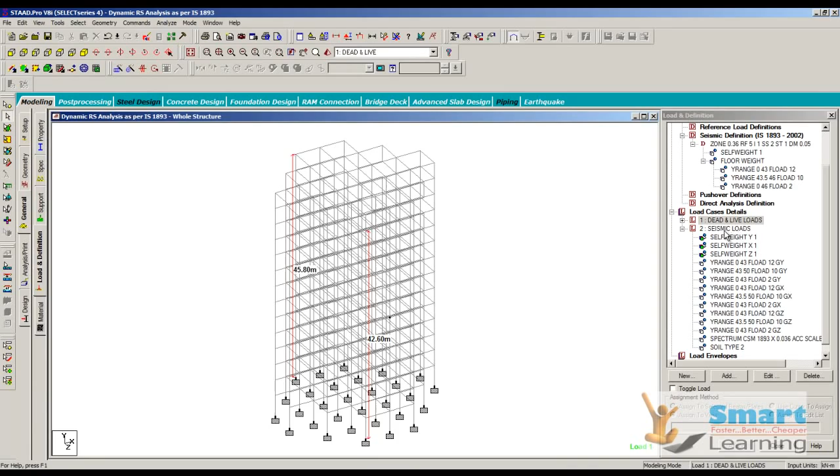So when you go to the seismic load and go to add, for the self weight direction go to X, enter 1 and add, go to Y, again 1 and add, and go to Z, 1 and add, so that these 3 will be added. After selecting this condition, you have to apply assign to view, so that it will be applied to your view, just like the Y direction, X direction and Z direction.

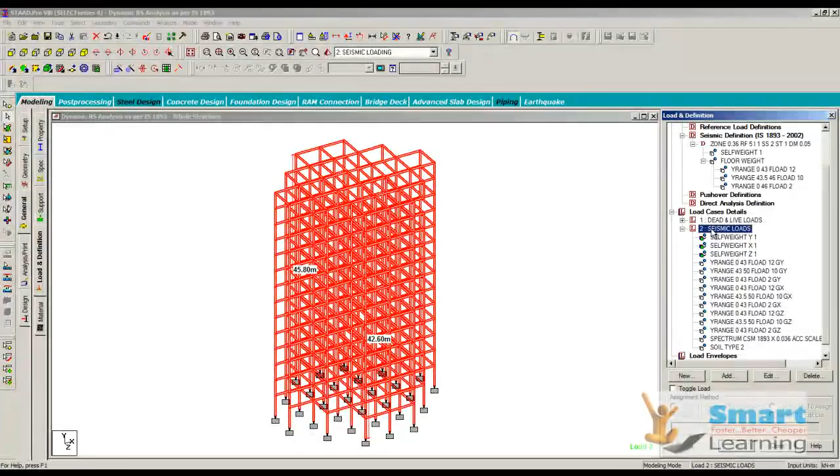So these are the 3 fundamental self weight contribution factors which you consider under the seismic load definition or the title you create, and you keep on adding that information. Now we'll move to the other side. Here you saw the dead load in the X, Y and Z direction. Next we'll talk about the dead load contribution on your floor load except the top floor.

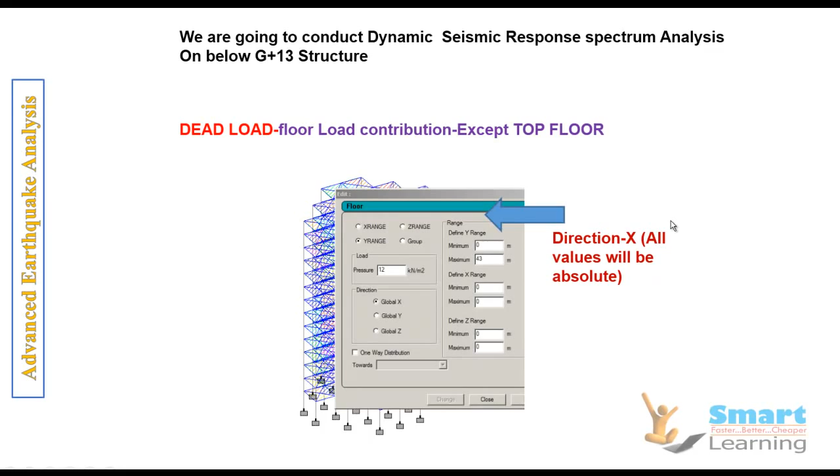It was -12. So for calculating in the direction X you have to go for 12. For the direction Y you go for 12. For the direction Z you go for 12. And here the range is 0 to 43. For the top floor also you have to go for the direction X, Y and Z. So except the top floor we have considered here the direction X. Again here the direction Y, same 12, only the direction is changed, and 0 to 43.

This is the second load case for the dead load except the top floor. And again for all the rest of the floors in the direction Z, this is the same factor. So here you have to apply it 3 times in the 3 directions, as you can see 12, 12 and 12. This 12 we have applied in the Y direction, this 12 in the X direction, and this 12 in the Z direction.

So for this seismic load, when you go to add and go to the floor load, here you go for 12, go for X, and set your range 0 to 43 because it is below the top floor, and go for add.

Again go to the Y direction and set 0 to 43 and go for add, and again go to the Z direction and 0 to 43 and go for add. So after that you will be creating this.

Just like that, for the top floor you have to again apply the 10 kilonewton per meter square 3 times in the X, Y and Z direction. This is the Y range, 10 without any symbol, negative or positive, Y direction, X direction which you can see here, and again for the Z direction. So these contributing factors for all these 3 directions for 10 kilonewton load

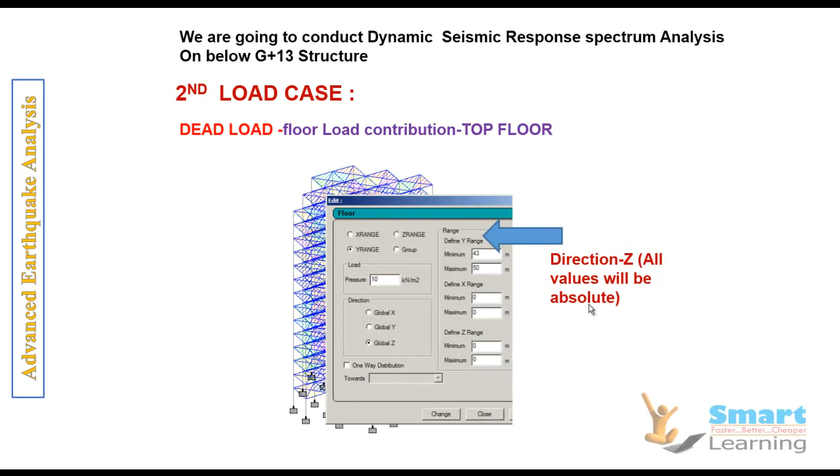need to be considered along X direction 43 to 50 for your top floor, 43 to 50 again for the Y direction for the top floor, and again for the Z direction 10 kN per meter square 43 to 50, because all this contributing factor will give you the seismic mass which you consider in your response spectrum dynamic analysis as per IS 1893 (Part 1): 2002.

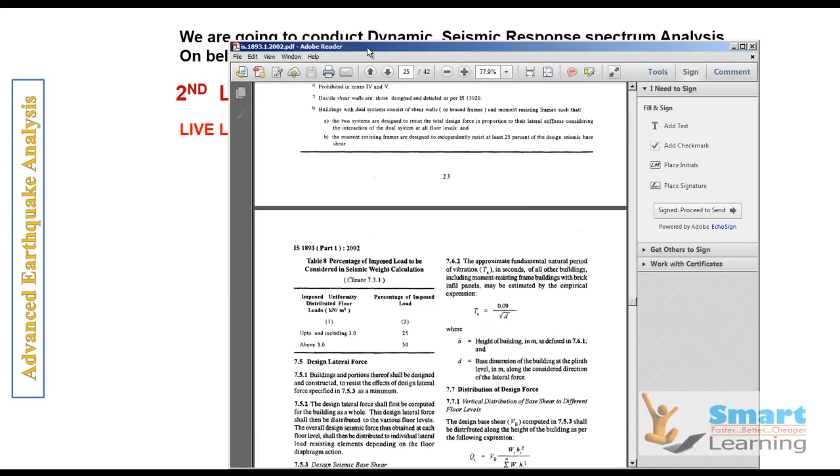And after that we are going to consider 50% of your live load contribution for all the floors. This is as per the IS guidelines, which I would like to show you so that you can relate why instead of 4 kN per meter square we have considered 2. So let us understand this from the IS code book. If you go to page 25 from your exercise folder, IS 1893 Part 1 2002, here you can see the percentage of imposed load to be considered in seismic weight calculations.

So up to and including 3 kN per meter square of uniformly distributed floor loads, the percentage of imposed load which you are going to consider for the seismic weight calculation will be 25%. But in our case, this is 4 kN live load. So above 3, you can see 50% you have to calculate, as per clause 7.3.1.

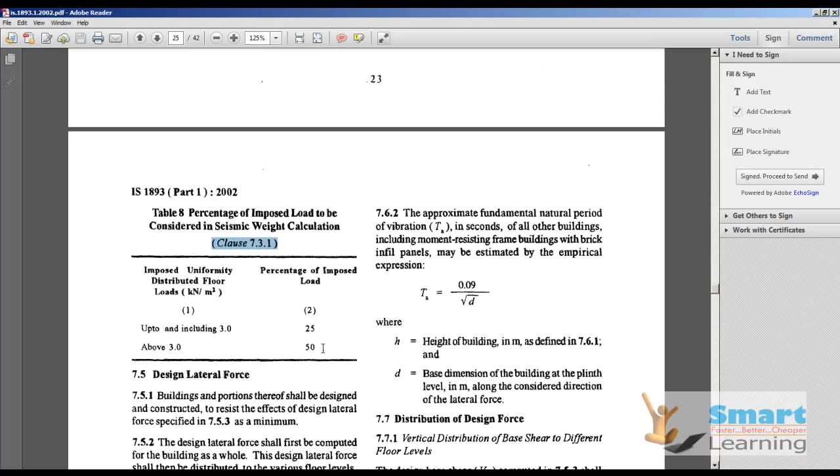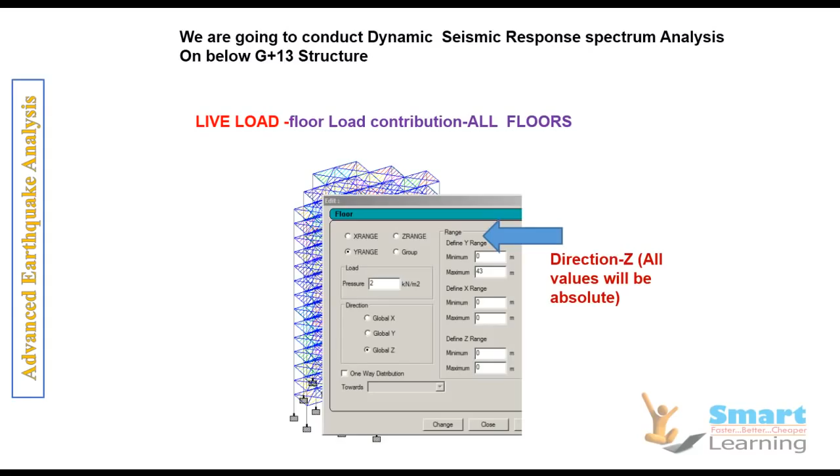So this will be 2 kN per meter square for all the floors in the direction X, in the direction Y between 0 to 43, and along the direction Z from 0 to 43. And you can also consider this between 0 to 50 so that all the floors will be considered. So what I will suggest is you go for 0 to 50 so that all floors will be considered.

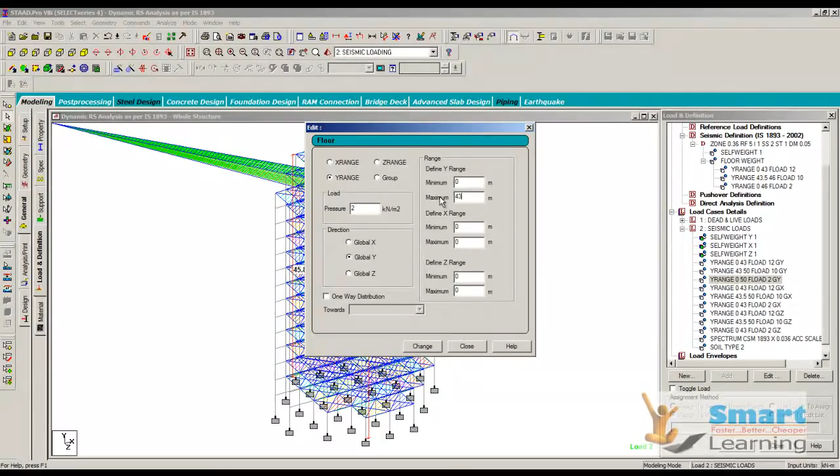In fact for the top floor it has to be 1.5 and its 50% is 0.75. So again you can apply a contributing factor. So what I will do is I will just keep it 43, and another step we are going to add here for the top floor. Go to add, go to floor loads, and 0.75 will be 50%, 0.75 kN per meter square in X direction between 43.5 to 50. So this will be for the top floor.

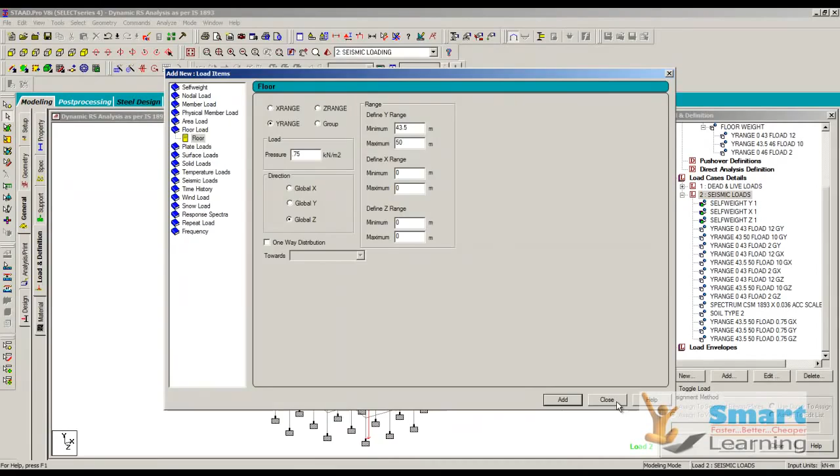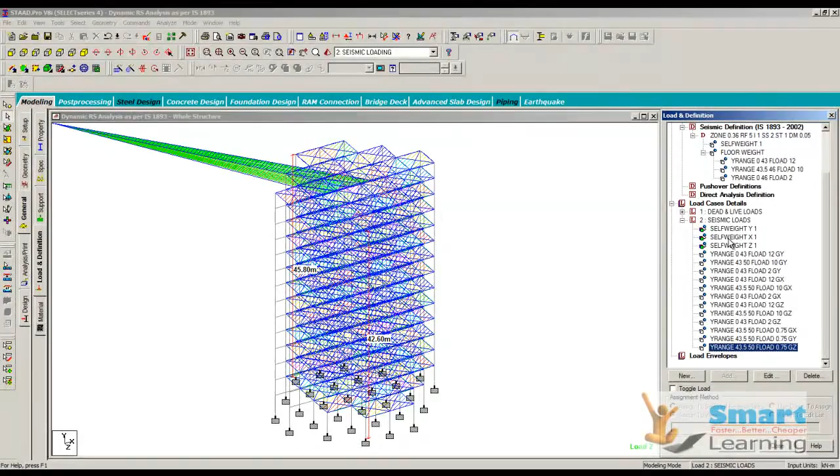Go for add, again go for the Y direction, go for add, again go for the Z direction, go for add. So this particular contributing factor needs to be considered, and the spectral definition I will delete. So these are the load cases, 4 different cases with the conditions. That means 12 cases for the floor load and self weight load 3. So 15 different cases need to be considered.

So this 3, 12 for all the floors: the dead loads, 10 for the top floor, 2 for the live load contribution of the floors, and 0.75 for the top floor, in the X, Y and Z direction. So these are the 12 cases, and these are the self weight contributing factors.

And in the next session we will understand how STAAD calculates the lateral seismic load and the different points and factors which we consider during calculating.